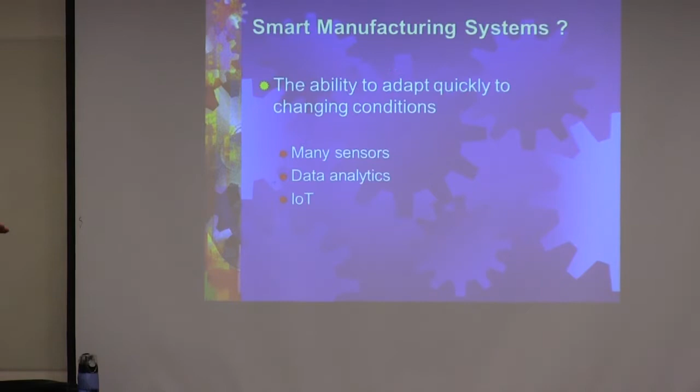Okay, so I'm Peter Denno. I'm a researcher at the National Institute of Standards and Technology. And I'm going to be talking today about a project that I've led for the last year in smart manufacturing modeling methodology. And I'll give you a sense first of what I mean by modeling methodology in smart manufacturing, and then we'll go into some detail about little sub-projects I'm doing in the process.

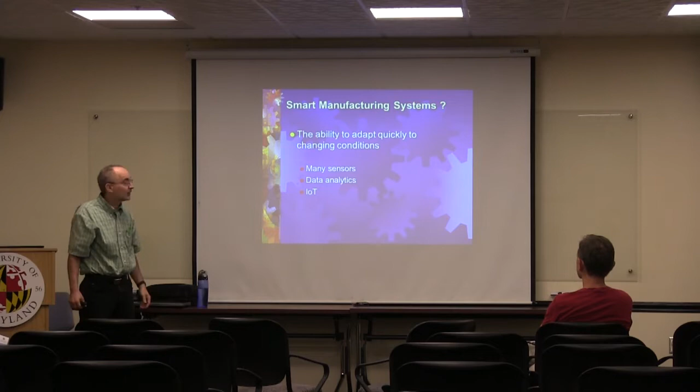So, a smart manufacturing system is a manufacturing system. It's a production facility, factory, call it what you will. What's new about initiatives such as smart manufacturing, and there's a couple of them, is the ability to adapt quickly to changes. Okay, so that's enabled by inexpensive sensors, data analytics, and Internet of Things.

So smart manufacturing is a government-sponsored program in the United States. Germany has something similar called Industry 4.0. Theirs is probably a little bigger than ours. In the US, we have other programs too. We have the Digital Manufacturing and Design Innovation Institute, which is supporting some of the same ideas.

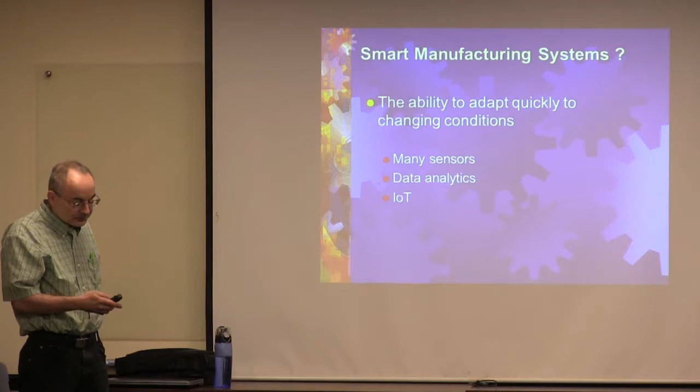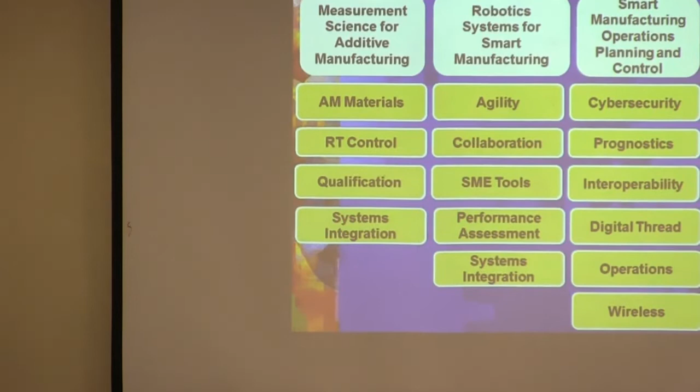So at NIST we have what we call programs, and those are these things here. Each program has some number of projects, and the projects have 3 to 6 people in each project. It will have 1 or 2 university grants or contracts and some industrial relationships. So we have work in additive manufacturing, robotics, and we split the pure smart manufacturing work into operations, planning, control, and systems. So my project is this one right down here.

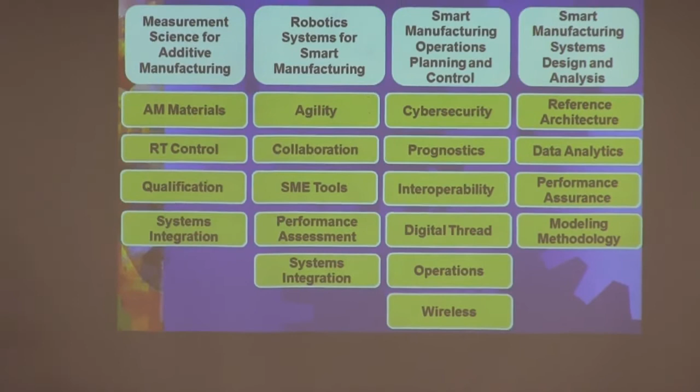So I'm going to only talk about a little bit of this, but there's all kinds of opportunities right now at NIST in these areas. And we work closely together. I work closely with some of these guys over here, some of these guys over here. Okay, so let me talk just about the project now.

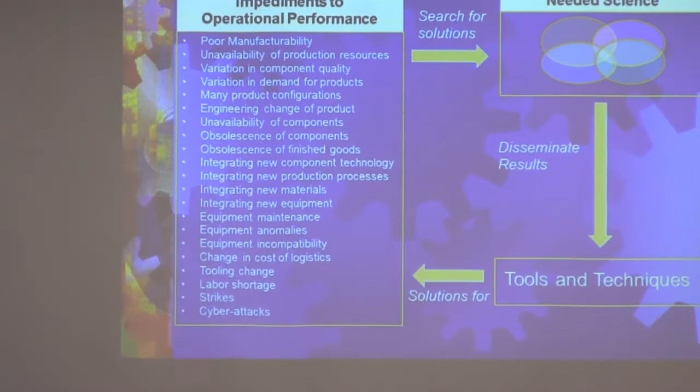Off to the left here, I have a list of 20 or so impediments to manufacturing. What is it that keeps manufacturing from being agile? And frankly, the first 2 account for probably 80% of the causes: poor manufacturability and the unavailability of resources. So you have the manufacturability issues and operations research, OR kinds of problems.

So this is a slide about our role as people doing research. We're not so much into building industrial strength tools, but we'll build tools. I like tools. As a means towards getting the ideas and illuminating the requirements in doing this kind of work. And then hopefully industry picks up. We work with industry on developing stronger tools.

So modeling methodology for smart manufacturing was going to embody a large body of knowledge. Right? There's ideas from design engineering, systems engineering, cyber-physical systems, operations research, and so forth. You need a number of these things. We cover a lot of ground.

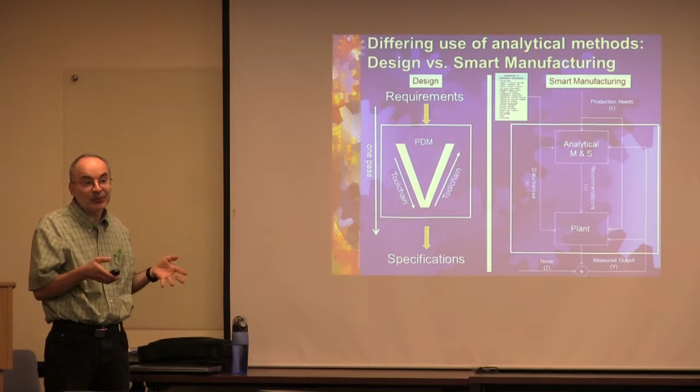So I think systems engineering in particular is important because there's so much nice research in engineering and design and modeling that could be applied in manufacturing. Of course, it's been applied for many years. But this slide is trying to emphasize the idea that it's applied differently in manufacturing and design. Now, in design, typically, this is the 100,000 foot level here, but you start from requirements and take one pass through to specifications. Right? There's a mature tool chain associated with doing design.

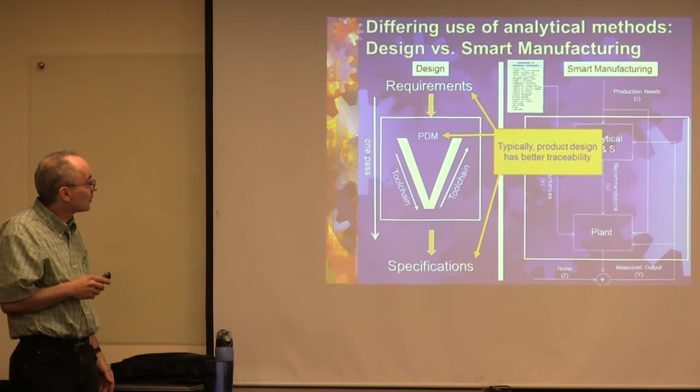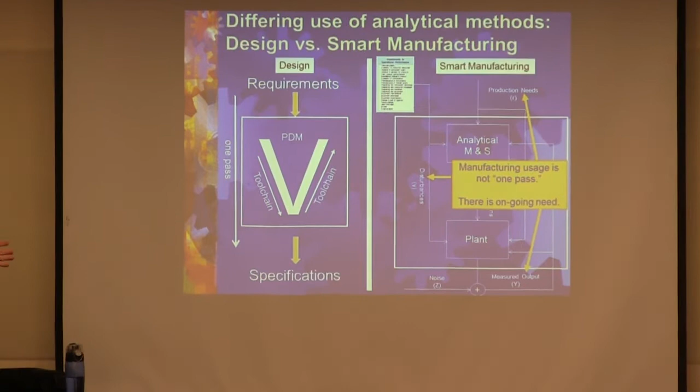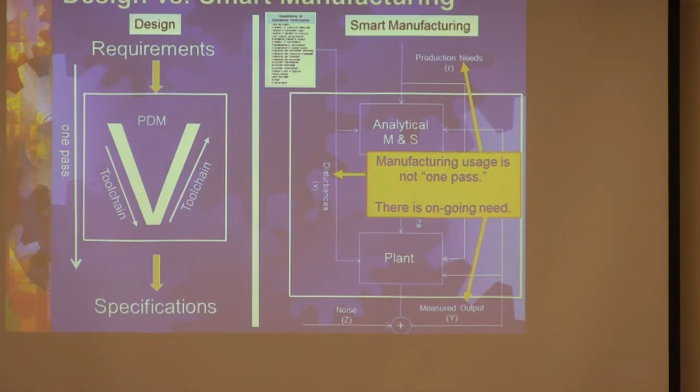Not so much the case in manufacturing. Here, I view the problem and the use of analytical tools as part of the control system. Okay? So manufacturing isn't this one pass thing, but there's an ongoing need. Back here's those set of disturbances I talked about a slide or two earlier. And the idea is that the engineer and the modeling tools are really part of the system. They're not creating a system in one pass. You're part of the system, continually looking for optimization of production.

Okay. So in doing that, you're faced with information that comes in many different forms, be it changes in demand, changes in components, component quality, material, changes in material quality and so forth, inventories, all sorts of different viewpoints on things that change there.

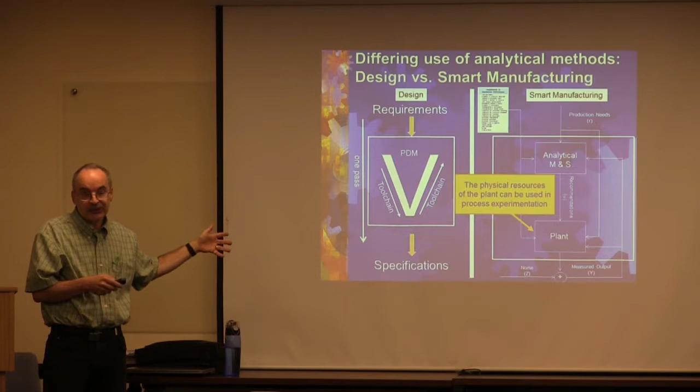And then finally, something you don't have in the design world is that, in essence, your plant can be like a laboratory. And you can use it to experiment with processes. And so these are some of the things that in my work I'm trying to leverage. So you can think of that M&S box that I showed there as an analytical framework. We're not actually making analytical frameworks, we're doing the research that enables these things.

But if I were to make a framework for solving problems in manufacturing, what would I try to do? One thing is reuse analytical knowledge. I learned something, I want to be able to apply it in as many ways as possible.

Be able to characterize problems and compose problems from components, which you do all the time with advanced tools and design engineering. And then there's this idea of the ability to verify the solution to problems at different levels, because there's different levels of detail that certain people are skilled in.

You want to build some capability that can be used out in a production facility. You might not be an engineer that's actually using the thing, but below that level, someone should be able to inspect it and say, yeah, you're applying the tools correctly, for that kind of problem the uncertainty is known and so forth. So that kind of quality is very important.

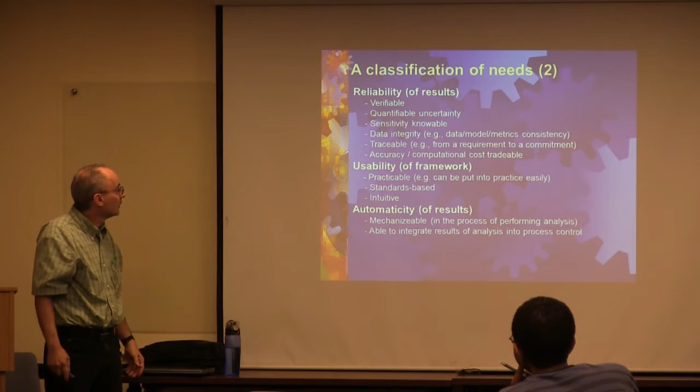You want to do it in a way that industry would be interested in seeing. So I have 2 slides about requirements, and later on we want to talk about these. We did some work to define requirements for modeling in production environments. So these are just reliability, usability, automaticity. Okay, so that's the basic ideas of smart manufacturing.

In a taxonomy, you don't have cycles, right? If it's a taxonomy, you probably want the sibling classes to be disjoint. So the metamodel is the thing that expresses this about the model, or some class of models. So the first reason I'm interested in metamodels is because you use them to manage models. At the very least, it's often the storage form. I put the model onto a disk and bring it back.

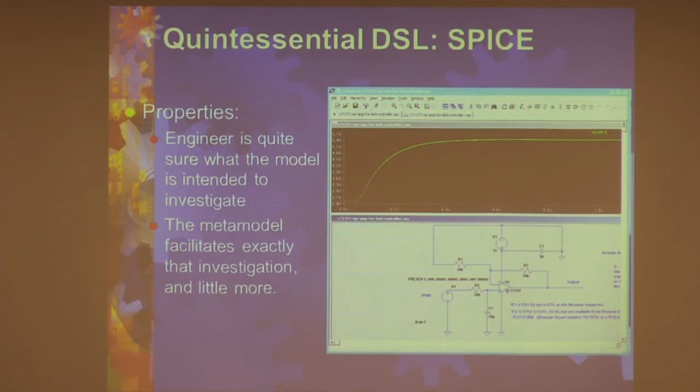The engineer knows very much what he's going to do with SPICE. These are tightly focused tools, unlike, say, MATLAB, where you can do all sorts of things. But you sit down with this LTspice tool, and you know just what you can do with it, and you do just that one thing.

So, one observation about DSLs: people who espouse the DSL way of working talk about it as something they're doing in opposition to more consensus-based models. SysML took over a decade to define, and there's still a standing committee, probably a dozen people who get together once a week and talk about how to bring it forward. It's a very useful thing, but it's a lot of work.

And trying to get that consensus to say everyone's going to agree that this is what a connector is and this is how connectors work, a lot of industry is not going to find the rationale for getting involved in that very compelling. So with the DSL, it's not meant to accommodate all those views. You just do what you need to, and that's some of the value of it. No need for consensus building.

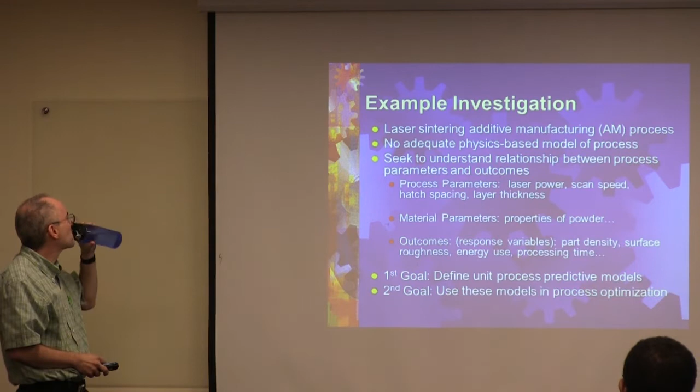And in doing that, General Electric is going to be faced with issues of getting those things certified through the FAA. So you need to understand pretty well the process and its capabilities so you can convince the FAA that these things belong in airplanes. Like I say, there's a lot of research there. It's not physics-based for the most part. They have empirical models and use design of experiments and so forth to understand these problems.

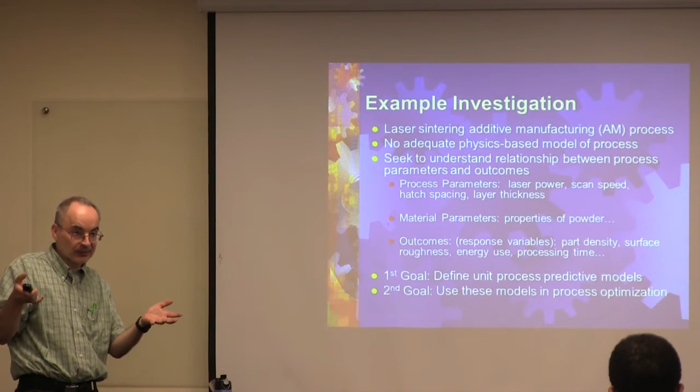So, in my example problem, as in most of these AM problems, we're going to look at a relationship between some set of explanatory variables, process parameters and material parameters, and their relationship to some set of outcomes, like the part density, the surface roughness, tensile strength, and so forth. And the goal of this little sub-project is to first define those unit process predictive models, and then to use those in optimization, where I have models for surface roughness and tensile strength and so forth, and I need to find trade-offs between those things by composing equations and coming up with an optimization problem.

So how do we solve these problems? As I mentioned, design of experiments is a way to maximize the information obtained from expensive experiments and use simple models. And there's great stuff written by NIST on the topic that I use quite a bit. So this is just the idea that you start with a black box, right? There's a set of control variables like the scan speed and the laser power that I mentioned earlier, and then there's outputs, which are the surface roughness, tensile strength, and so forth.

And here's a flow chart of how you might go about that. You identify what you're trying to achieve with your AM process. Well, I want it to be strong, I want it to be close to the design tolerance dimensionally, and so forth. In solving the problem, you might do some screening experiments to identify the key variables affecting the response.

Then you would do some more experiments to define the actual relationship, the regression model that you're going to fit to. Identify the uncertainty in that, and then probably formulate optimizations, which are the trade-offs between those things, right? To actually come up with knowledge that is useful in operational settings. So having done all this, you get to this point, and now you have ideas that you can put into practice as an optimization.

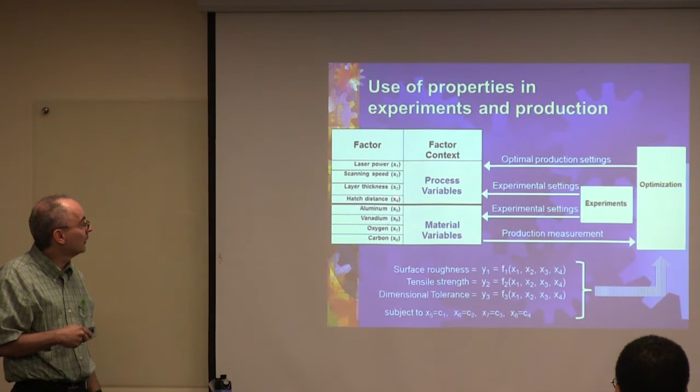But in production, typically you wouldn't do that. You get this powder metal from the supplier, and it is what it is. It's supposed to be what you asked for, but you're not going to change it in production. Let's assume you don't have that capability. You really don't. So in production, the material variables are going to be constraints, and the optimization problem is these are the design variables. You get the design variables and then these things which are going to be constraints. And if you get all that done, you have a tool that's useful for production.

So now I'm going to start bringing in some of those ideas of the meta modeling and so forth that I talked about earlier. So I talked about this control system paradigm, the need for reusability, metamodels, composing views, mapping, no APIs, and so forth. So maybe you can guess what I'm thinking. Maybe not, but

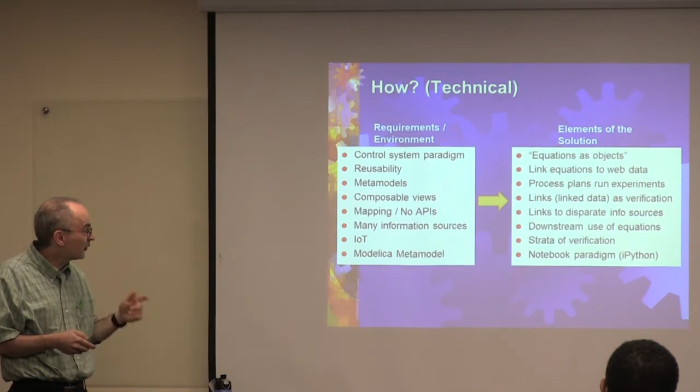I had this idea that I'd like to treat equations as objects and link those equations with web data that talks about the meaning of a property, so I can do dimensional analysis. I'd like to use the production facility, as I suggested, as an experimental lab. I'd like to do the verification with these links to data. I'd like to be able to point to, in particular, inspection data from the process plan I ran as part of an experiment and bring that data back and say, well, that's the data I got, and I have traceability back to that data by approaching the problem in a web-based way. So strata of verification, and then this idea of doing it all in a notebook.

So I had this idea of doing this with a notebook because notebooks are a nice way to generate engineering reports. But we'd like an engineering report with all these links out to the production facility. So if I do that in an open notebook like IPython, which runs in a web browser, then I can make links to URLs and so forth and bring things in with web services to get the data into the problem solving. And of course, Python has lots of nice science libraries that will make that easier.

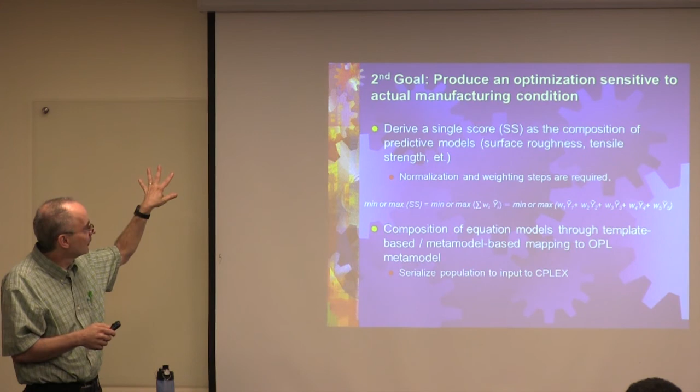Okay, so what I've achieved here, the second goal is to build that optimization as a composition of equations. So what I've achieved through doing this equations as objects thing is to look at problems outside of the tool and try to raise the level of the knowledge that was embedded in the tool out to a broader context where that can be talked about in engineering reports and manipulated, pulled into ad hoc analyses. So that's one of the research questions.

I think there's probably value in talking about the notebook as this enterprise linked thing. So that's another aspect of this. And then the details of using the population and template to step away from APIs is another issue. That could be the key research contribution here, just to suggest to people that if we're going to move forward in higher levels of compositionality, the way to do it is to get away from these APIs and use a more knowledge-based way of putting information together.

So that's pretty much it. So I tried to illustrate this idea of the control system paradigm, the idea of using the web data with metamodels and models. The idea that the analytical framework is not the center of the world, because you see a lot of research out there that says, well, if I can only put all this information into the form I need for analysis, if the world would just be the way I want it, I can do this analysis very nicely.